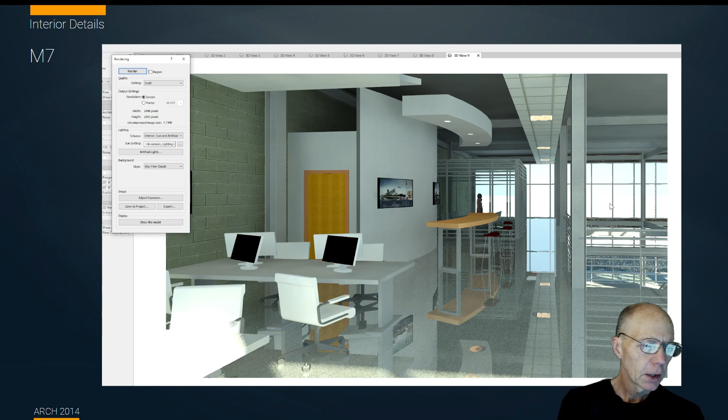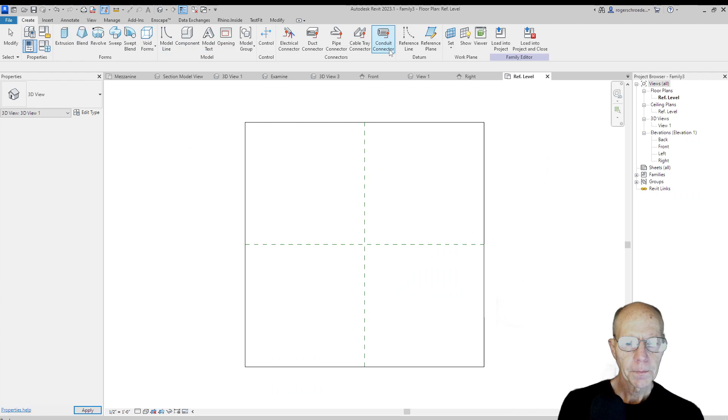I'm going to bounce back out to Revit. And we're going to open up a new file, a new family. And we'll still make that a floor-based generic model. And if we go to the right view, let's create a reference plane. And we wanted that to be, I think it is 2'4". Our countertop height.

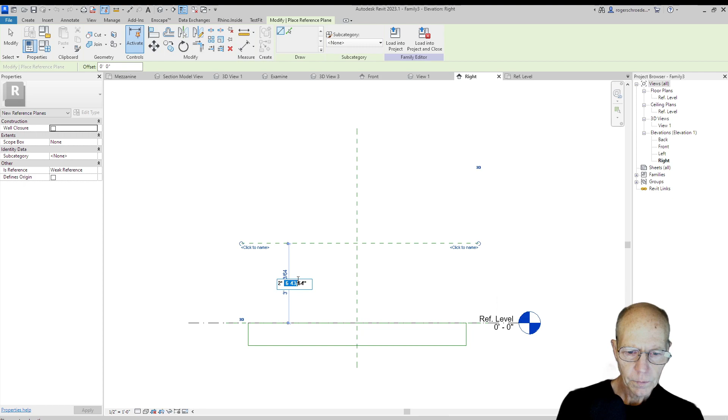And we'll start at the front view, and we'll make an extrusion to be the monitor itself. I'm going to start up here just off the screen. I'm going to go 1'4" by 9 inches, 16 by 9, which is the aspect ratio of an HD display, 1920 by 1080, or a 4K display. And then I'm going to just scale it up to the size we actually want it to be, keeping the same aspect ratio. So I'm going to use the scaling tool, click, and we'll just expand out until it's like 1'11", just under 2 feet.

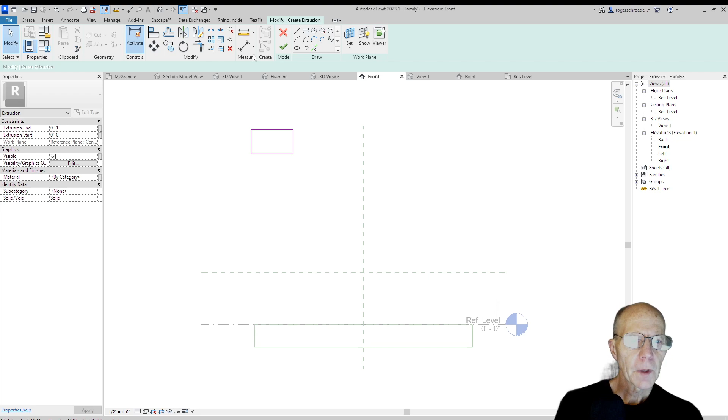And we don't want to extrude it a foot thick. Excuse me, I don't know why that just appeared. Oops, let's make it 1 inch thick. And there we go. Now we need some colors for this. We want this to be white. So I'm going to make 2 colors. I'll make black first because if I make white at the end, it'll be the default one. But we need a black and a white.

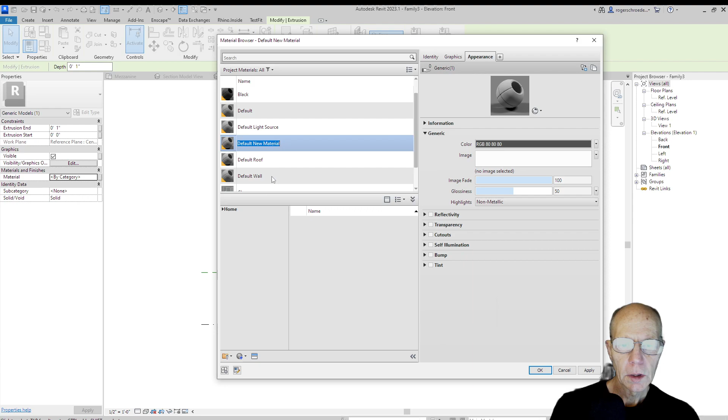So I'm going to go ahead and create a new material. And the first one I'm going to rename as black. This will be what the screen looks like. And we'll give it the color, not completely inky black, but just close to it. And we'll make the white color now, create a new one, and I'll rename that white. And we'll make sure that color, once again, is not completely white, but just very close to it. Go OK. Now that's assigned a white color. And we can actually move that into position now.

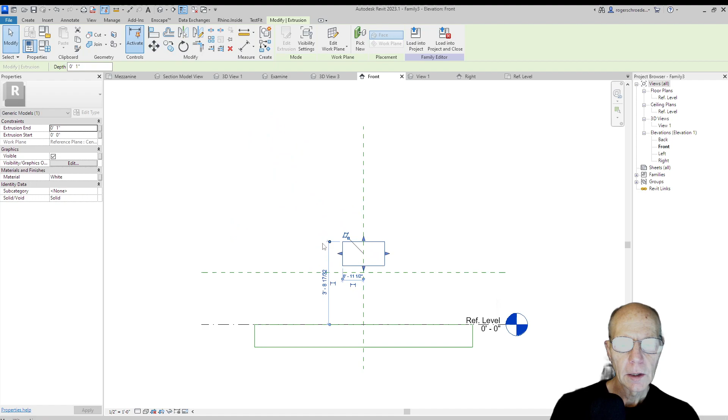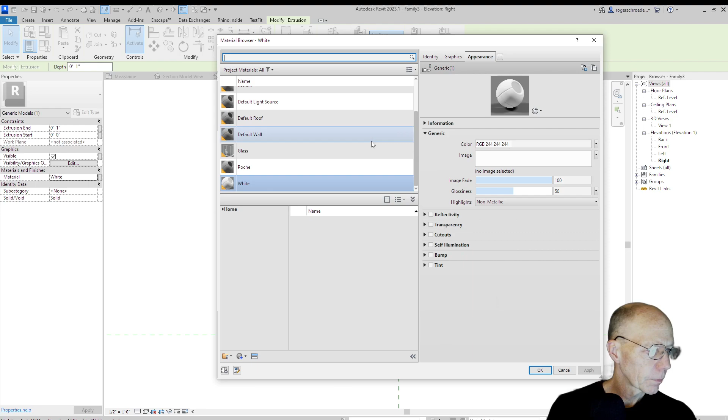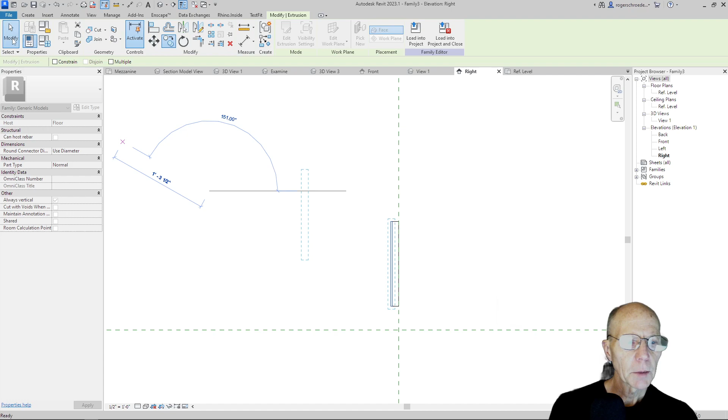And that's the monitor itself. So let's go ahead now and create the screen. So I'm going to use the copy tool and make sure this is unconstrained. And we can turn multiple off. And I'll just move this over. A duplicate rectangle, and we'll label that black. Once again, that's going to be the screen. And we'll make this 1/4 inch thick. And I want to make sure that it is assigned the color black. And then let's look at this at the front view.

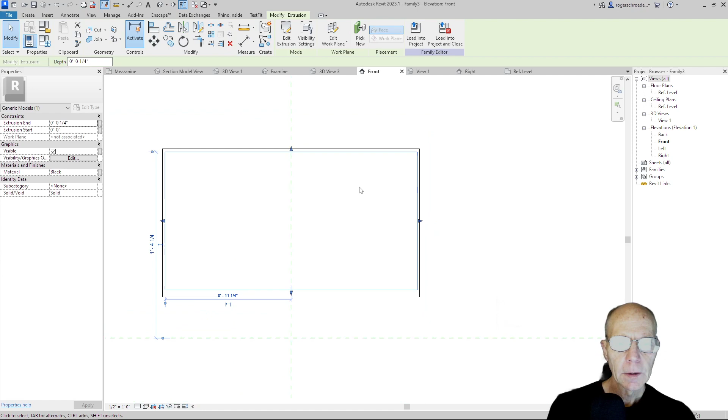Let's just make a little bit of a modification to this. I'm just going to pull it in a little bit so we can see the edges of the monitor. Maybe a little bigger on the bottom. And then a little hint on both sides. And then we'll look at that from a 3D view. And I'll render it just to make sure our colors are correct. That looks good. So let's go to the right side of this and tilt our monitor a little bit.

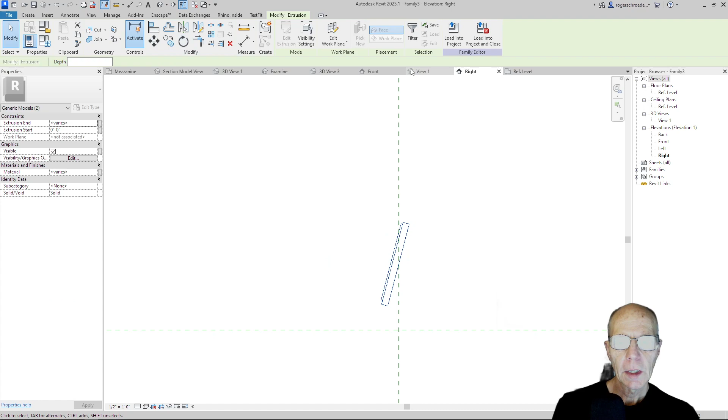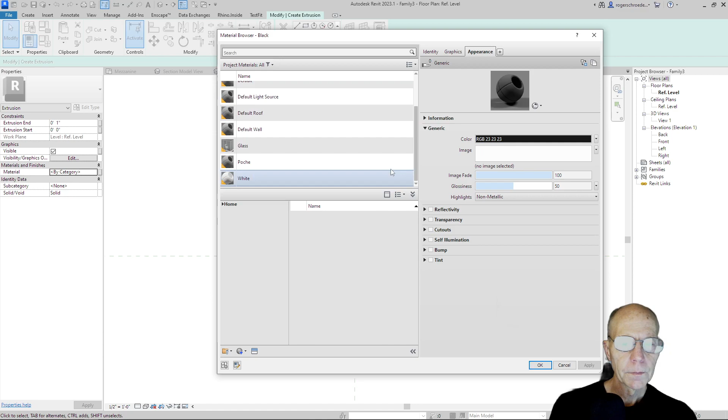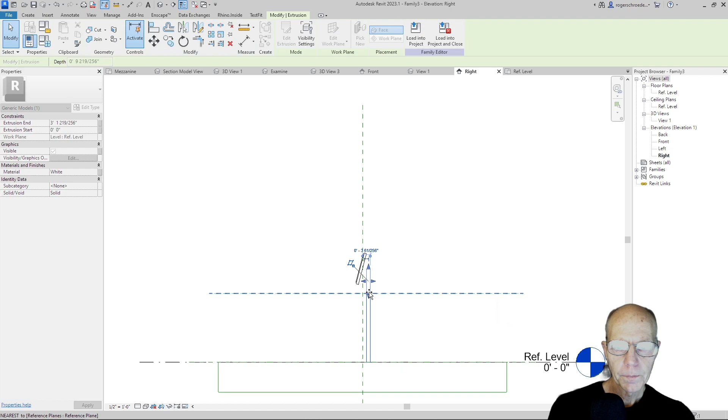And we'll go to the top view and create a stick kind of object to support it. Do an extrusion. I'm not sure which side we're on here. I'll try this side. We'll just extrude it for 1 inch right now. We want to make sure that it's the white color. Oh, and that showed up on the floor, obviously. So we'll just pull that up. And I'll just move this over until it's closer underneath. Looks pretty good.

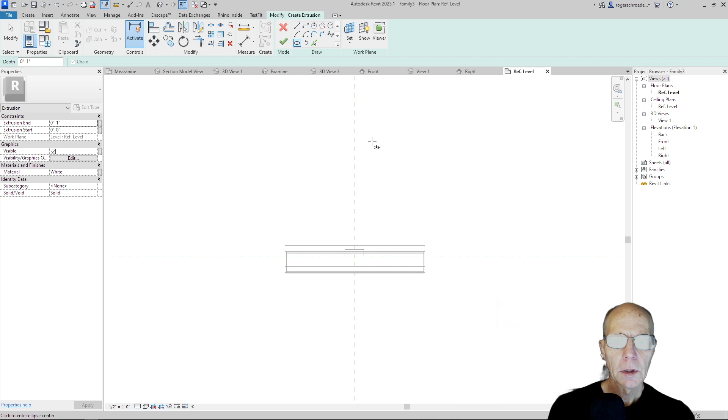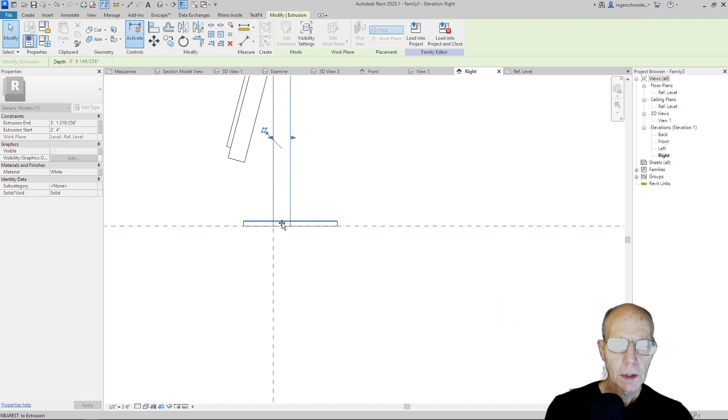So now we need a little bit of a base for it. So back to the reference level, create an extrusion. This time we'll use our ellipse tool. See what that looks like. And that's picked up the characteristic of white, so we're all set there. Let's just take a look at it now. That looks pretty good for a start. So let's save this.

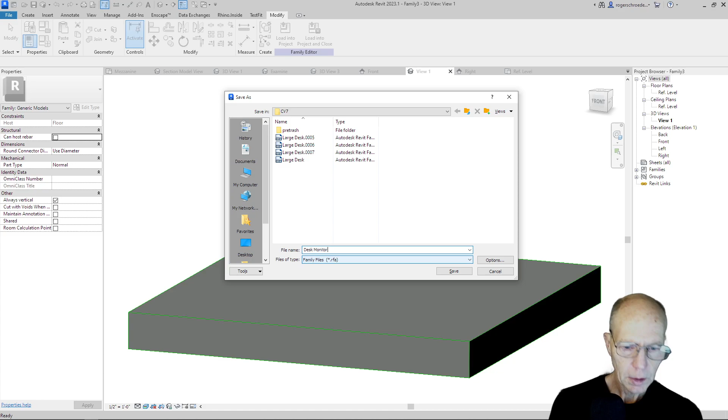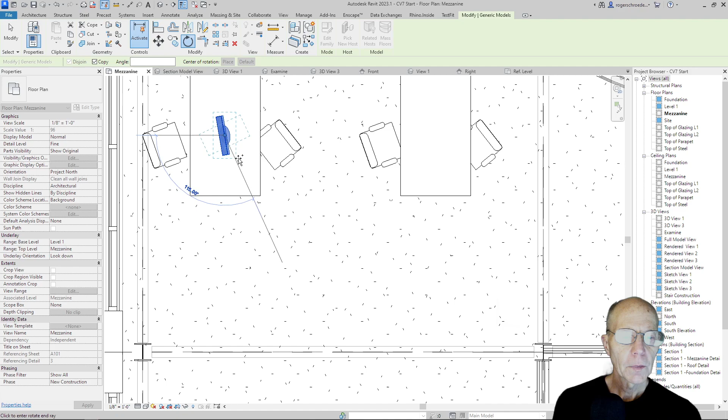I'll call it desk monitor. We'll save that and we'll load it into the project. And we're ready to place it on the desktop. So I'll go ahead and place one there. And then let's rotate that a little bit. And we'll make a duplicate one. Actually, we can use the copy and rotate. We'll just turn it around and move it.

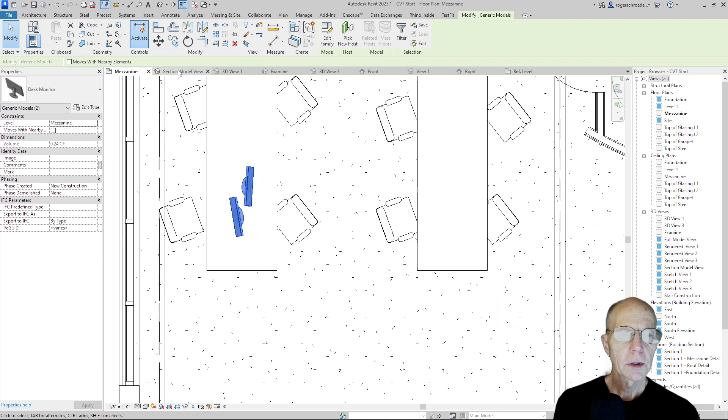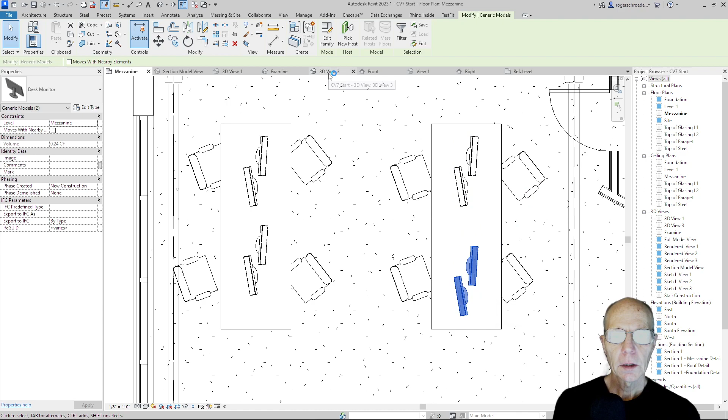And then let's just do a few duplicates. Should have set that on multiple. And let's take a look at this now from a 3D view. That's one view of it. And I think we have another view here somewhere. There we go. So we're all set with placing monitors. It looks like they're interfering with each other. Nope, I guess not. So looking pretty good. So we're all set with that.